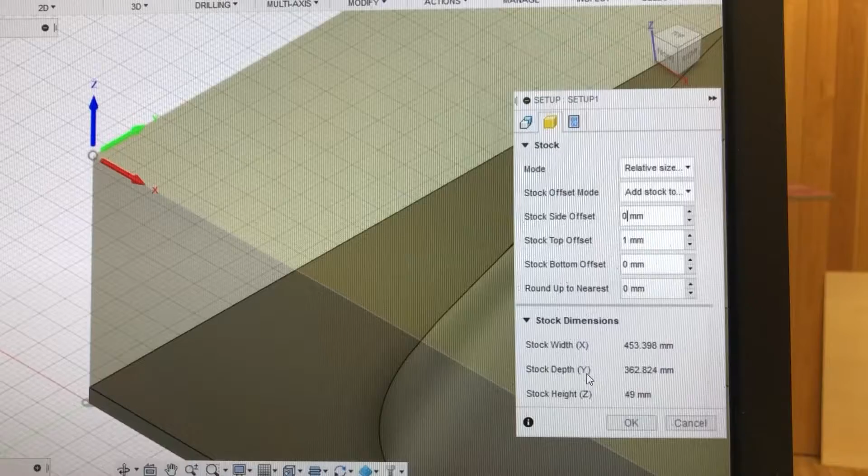Make sure that you have taken note of the stock width, depth and height. Make a small sketch of this. So Z, X, Y, X, Z, Y, and write up the values. With the X, Y, and Z values annotated, you can make a quick sketch in just the X and Y dimensions to the stock material that we're actually going to cut.

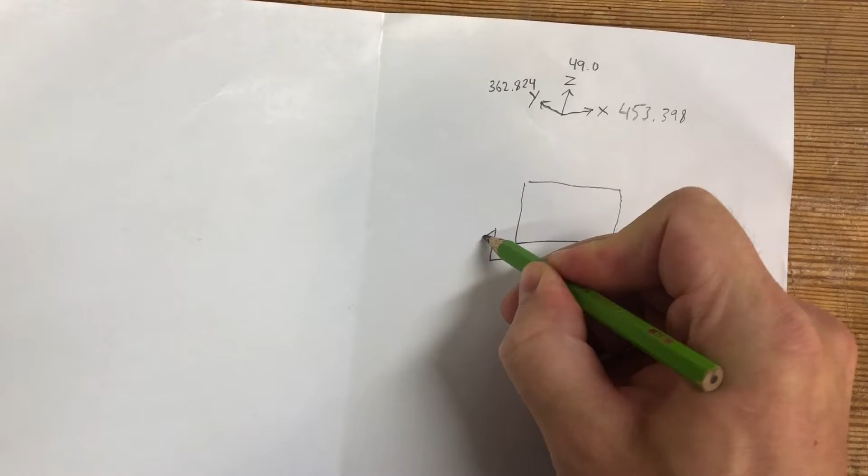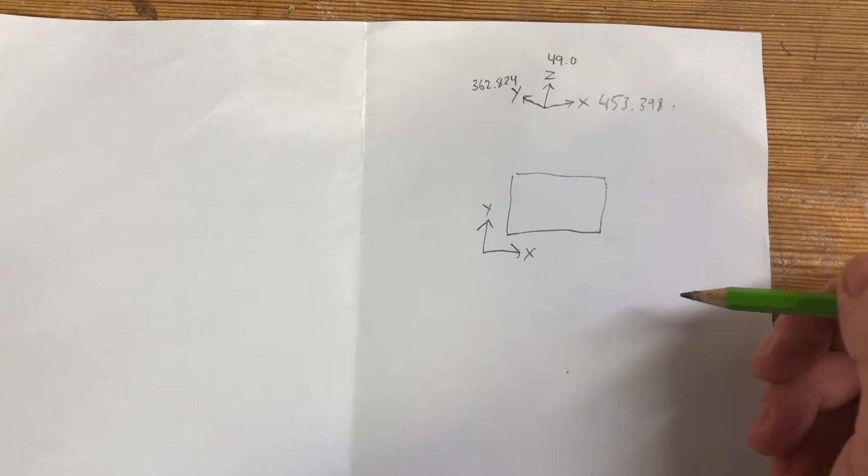Based on dimensions of the router bit we used, these true stock dimension values can be approximated by a little or a large margin. In the case we're using a clearance tool of 16 mm diameter, 8 mm radius, so we can have a tolerance or a margin of perhaps a couple or 3 millimeters. Thus, we can round up this X value to perhaps 456, and we can round up this Y value to perhaps 365.

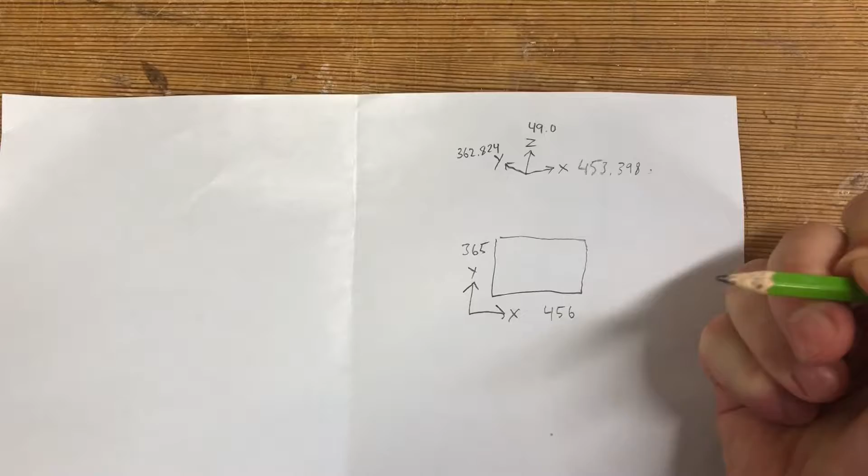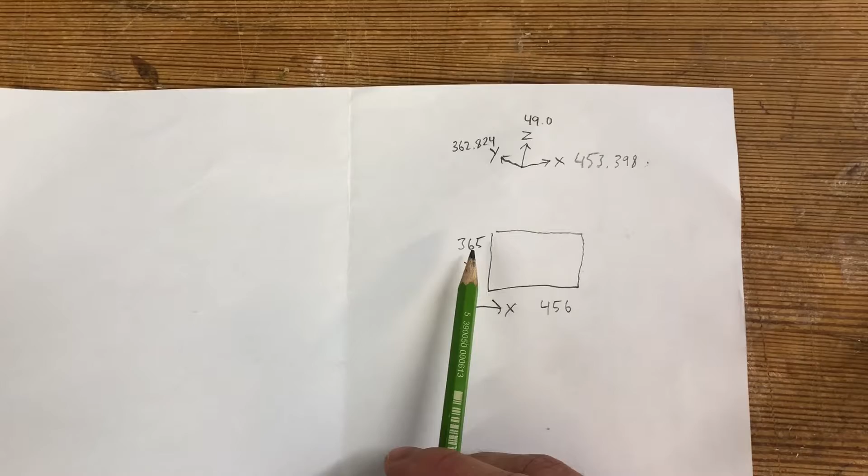These are the dimensions of the cut that we're going to make with the actual stock. The advantage of this is that the true stock is fully contained within the stock that we're actually going to mill. And also that the tolerance is on the surplus side rather than on the deficit side, so that if we cut by an error of 1 millimeter, then it still contains the true stock.

For this particular stock, we're going to use 3 sheets of plywood, each glued as a whole, with a total height, total thickness of all sheets glued of 49.5 millimeters. Which is within our tolerance of 49 mm true stock. If the actual stock would be smaller in height or smaller in thickness than the true stock, that would mean that the bottom margin would be diminished, and that is something we want to avoid.

On the other hand, if the actual stock is slightly larger in the Z dimension than the true stock, then the only disadvantage is that we're leaving more bottom margin than intended. But that is not necessarily a bad thing. It only means that you're going to have to remove a thicker bottom margin.

It is a sound thing to roughly sketch up the intended cut on the material that you're cutting, so as not to make an erroneous cut when doing the actual cutting. So here, 456. And here 365. This is just a rough sketch.

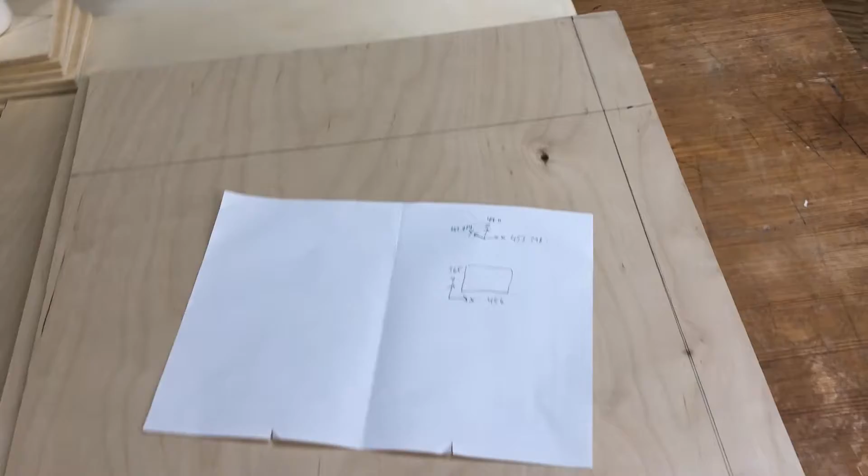Just so you know that you're not making an erroneous cut. And you can repeat this for all 3 sheets in this case. Very good. There are different ways to use the Altendorf to cut your intended stock material, or the individual sheets in this case. I'm going to demonstrate it here, cutting with this as an end stop, making sure that this end stop is in front of the saw blade so as not to be constraining.

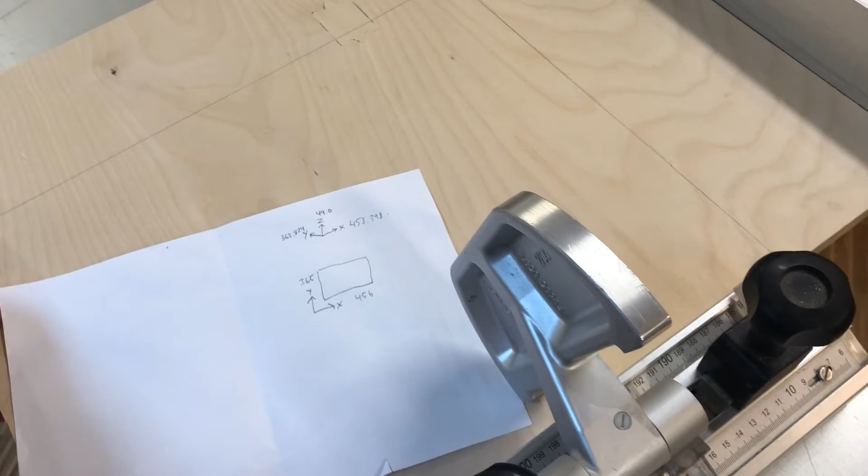Alright, having made sure that this says 456 millimeters or so, and that this is positioned here. Then repeat this for all sheets. When you have cut all sheets for that X dimension, you can do it with the Y dimension.

So here is 365 millimeters. We'll adjust this to 365. Make sure to position this there. Repeat for the other sheets.

When all sheets have been cut to the intended dimensions, it is time to glue them together. But since gluing is a time-relative endeavor, we should be fully prepared before actually applying the glue. So one thing that we should prepare or make sure of is that we have lots of glue ready. We will be covering all the surface of the sheets where they glue together. And also this press here is recommended to use.

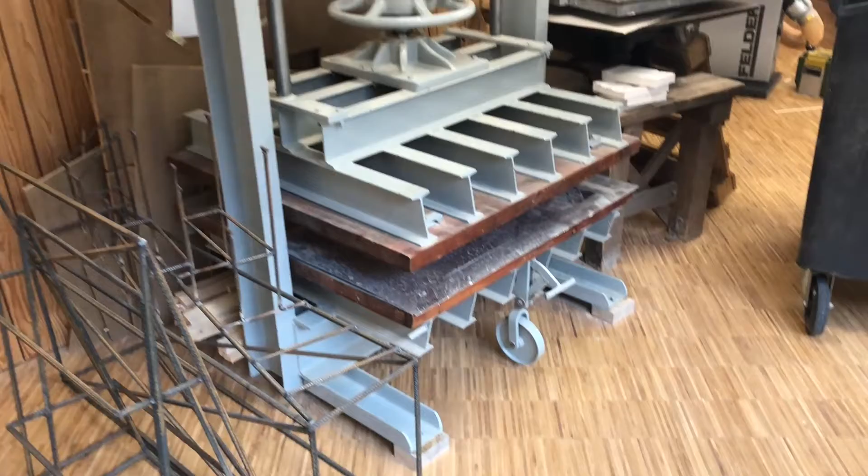And to save ourselves time when we have applied the glue and are going to press it, we can also adjust the height of this so that it's just a small margin to tighten.

One note about this is that this press has two sheets of metal here. It is intended that one sheet is on top of the pressed object and one underneath. They are quite coarse due to glue having been spilled on the surfaces, so it is equally recommended to invest in two sheets of bokpermspapp, and then you can put these sheets of bokpermspapp, one above and one below the actual object.

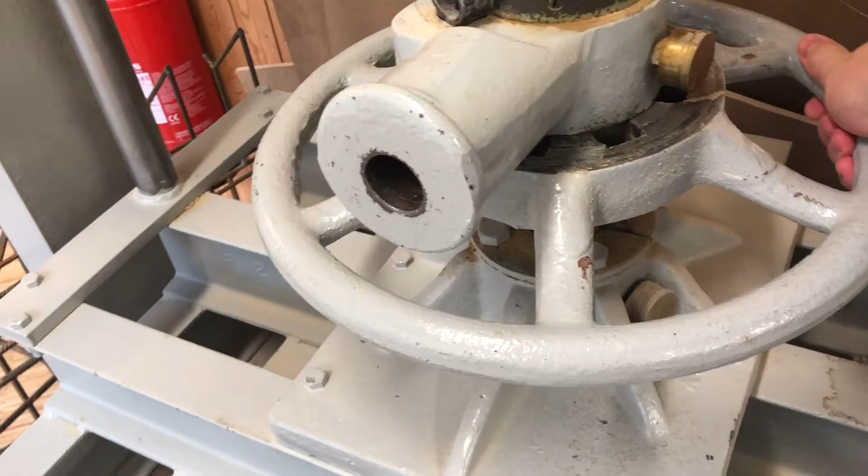To compress the press, you simply turn this wheel clockwise, and to decompress it, you turn counterclockwise. Make sure to place the bokpermspapp accordingly, like this. And to make things easier later on, we can make sure that the upper layer is a little extended so we can easily grab it.

Alright, before actually gluing, also make sure that you have some paper to remove excess glue along the edges, and also to position your sheets so that you can easily stack them after gluing. Let's glue. Cover the whole surface area.

Having made sure that all of the surface area is covered, we can position the adjoining sheets onto it and repeat the process.

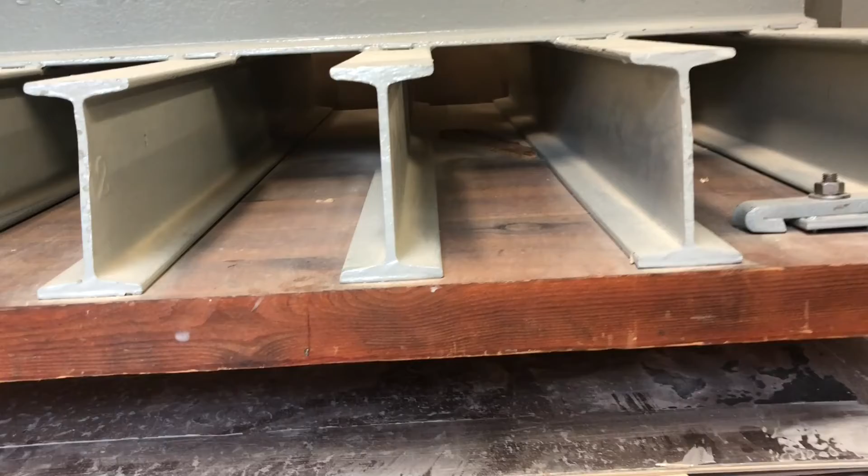You can check where it is positioned from the side here. You see that it's not centered, so we push it inwards. Having done that, we can compress it. Let's make sure that it's centered. Very good, it looks centered. And then we can compress it. So righty-tighty, clockwise here, and just gently descend the press.

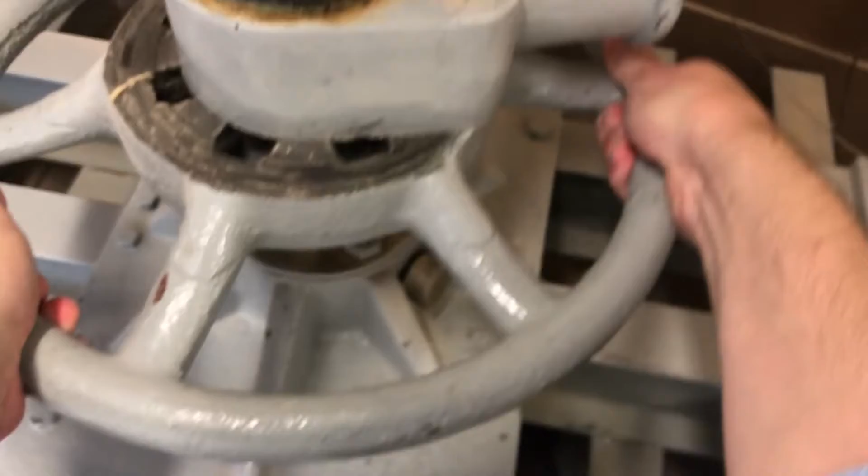All right, it is descended. Then we can push a little more. All right. And then let it rest in the press for at least 30 minutes. And then we can decompress it.

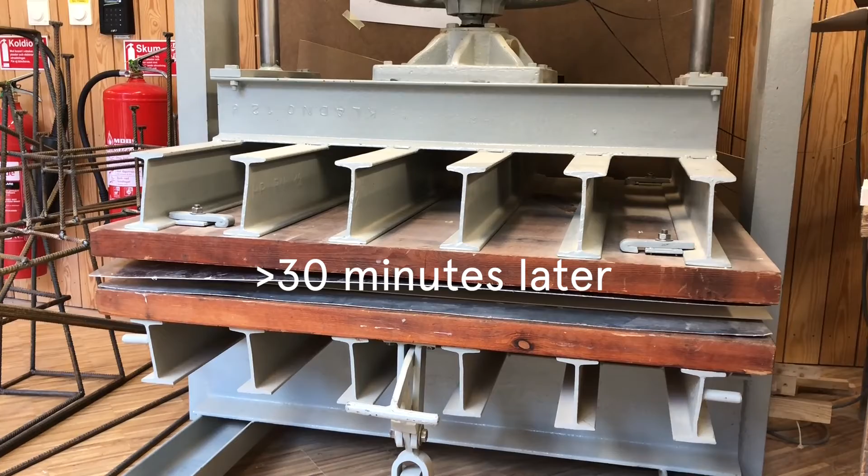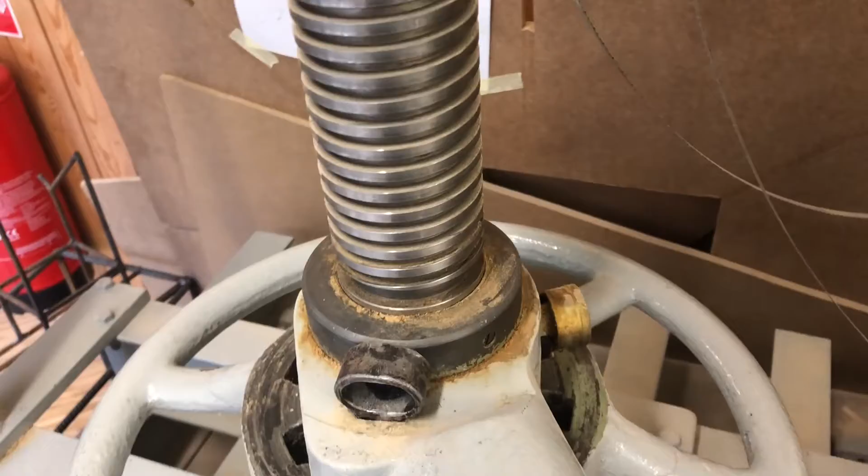When the glued sheets have rested here, compressed in the press for at least half an hour, you can decompress the press. And you do this by turning this in a counterclockwise manner. Having decompressed the press, you can take out your material stock. Now our completed stock is ready for milling.